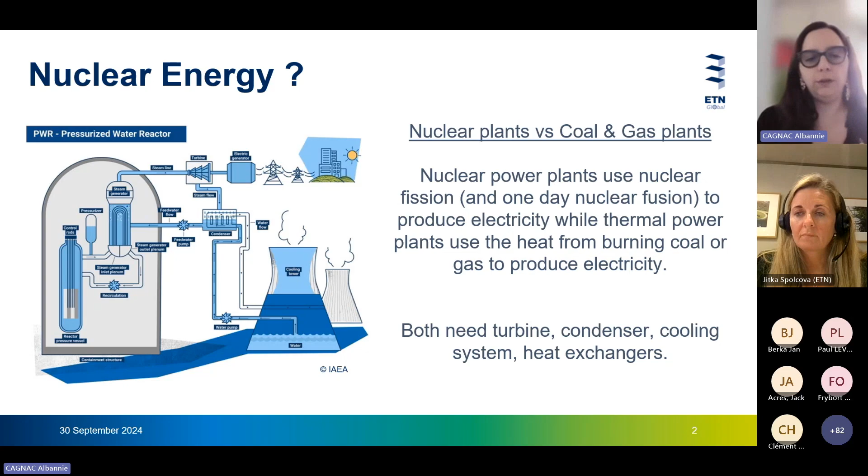Currently nuclear energy is 10% of the worldwide production of electricity, so more than solar, wind, and geothermal, and less than hydro. We still have coal and gas as the first plants.

But things are changing. For example, in Europe, so in the European Union, we now have between 22 and 24% of the total electricity produced with nuclear energy.

You can see that a lot of countries are already using nuclear energy in the European Union and also in the UK. We will see in the next slide and with all the presentations that there are a lot of projects to maybe have more countries or more designs with nuclear and supercritical CO2.

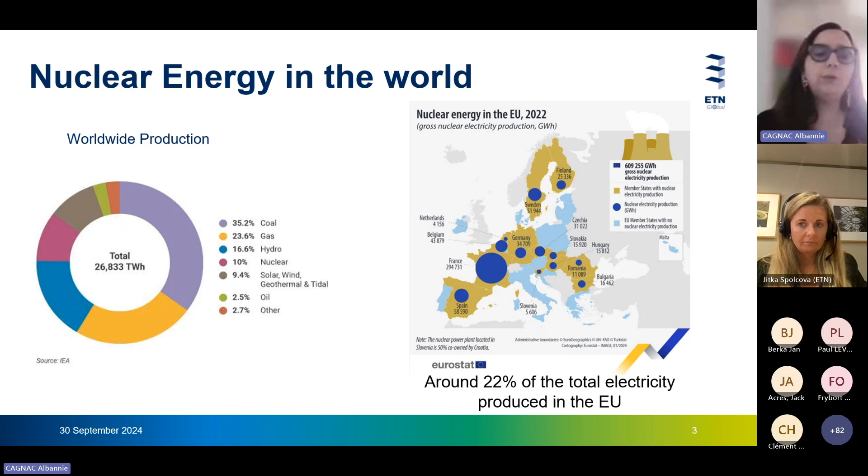But why do we choose nuclear technology today? Because I think that in the mind of a lot of people, and for example me some years ago, we think, okay, nuclear plants are the same since the 60s. But now we have a technology that has evolved with scientific and engineering advances.

So yes, we had the first generation in the 60s until the 80s, and now we are currently using generation 3 with some concepts you already heard about, like VVER, EPR in Europe, but also APR, or for example the AP1000 with Westinghouse.

You have to know that since the first ideas of nuclear energy used for electricity, we also thought about generation 4 - all this innovative design with gas-cooled fast reactors, molten salt reactors - you will hear about it today.

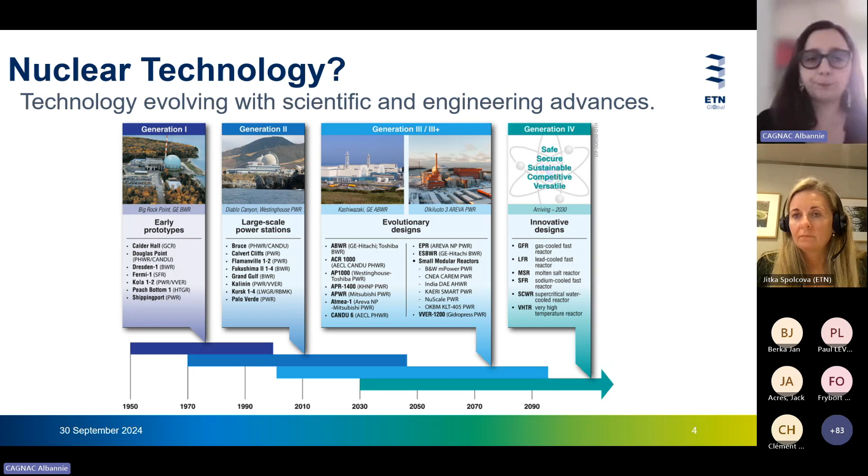So currently we are using generation 2 and generation 3 of nuclear power, mainly with water and steam, what we call the pressurized water reactor. We are studying and preparing for generation 4, and we will present today a lot of designs which are currently from generation 4, and also one design from fusion.

Why use supercritical CO2 in nuclear? You have to think that the first research on the use of supercritical CO2 cycles in nuclear is from the 60s and 70s. It's not a new idea. For us nuclear people, we've thought about the use of supercritical CO2 for a long time.

Because we already discussed in the former episode that we think the properties of supercritical carbon dioxide could be very interesting for us - high density, good temperature for us also.

As we already spoke about the properties of supercritical CO2, we have a lot of generation 4 concepts like the sodium cooled fast reactor or maybe a molten salt reactor, which are at good temperatures and pressures for the use of supercritical CO2 for the secondary loop, so after the reactor in the nuclear reaction. Okay, so that's why for a long time we've thought about this idea.

And if you are looking for studies, there are a lot of publications from the 60s until now dealing with supercritical CO2 and nuclear use. But why today do we choose to speak about this? Because it's not really a new subject.

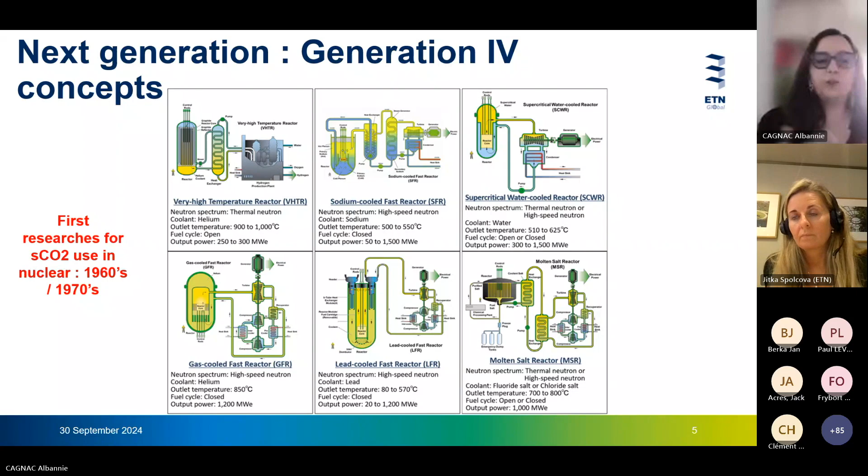It's just that since some years, we have a reviving interest in the nuclear potential for the global transition. Why? Because nuclear is a low emission energy, so carbon free, compared to coal, gas and oil.

But also with the idea of this global transition, we will have a higher demand of electricity and energy in the world. And to be able to reply to this higher demand, we have to think about a lot of carbon-free production. So renewables like wind, solar, or hydro are a good solution, but

we cannot meet all the demand with only this energy, just because okay, we will have solar, we will have hydro, we will have wind, we will have storage, but sometimes we will need to have a very reliable and safe flexible energy.

And we think that we can see in the new scenarios, from IEA or European scenario, also outside Europe, we will have a combination of this energy. So renewable, carbon-free energy, and nuclear. It's not a competition between all this energy, it's just combination. We need all this energy to face the challenge of global transition.

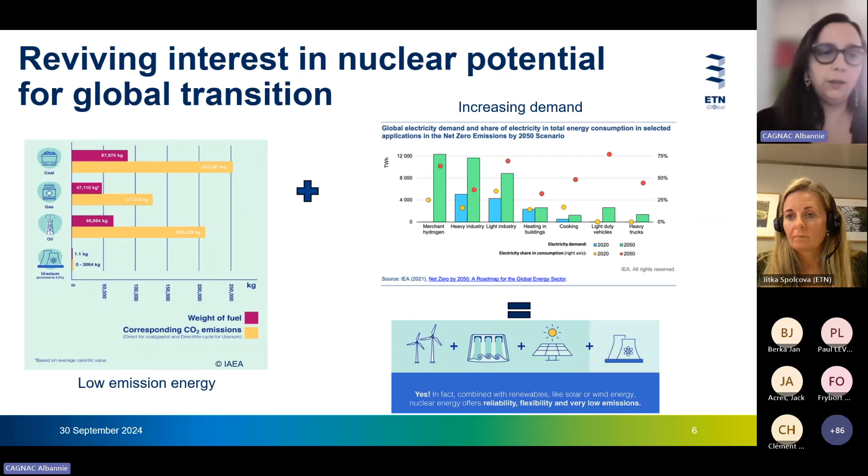Also, what we see in the last year is that maybe the thing is to use nuclear for non-electrical applications. So with a nuclear reactor, as I say, we produce heat. So if we have the current transformation plant, we will produce electricity. But we can maybe put some other transformation plants and have a use of this heat for industry use. But also we have some designs for district heating with nuclear energy, and also desalination.

So if we want to use nuclear for the higher energy demand for this new application, what we can say in the different international scenarios and projections for energy is that we will have an increased power capacity of nuclear in the next years. So as you can see, it's not only nuclear people who say that, it's the IAEA, it's also some projections from IEA reports.

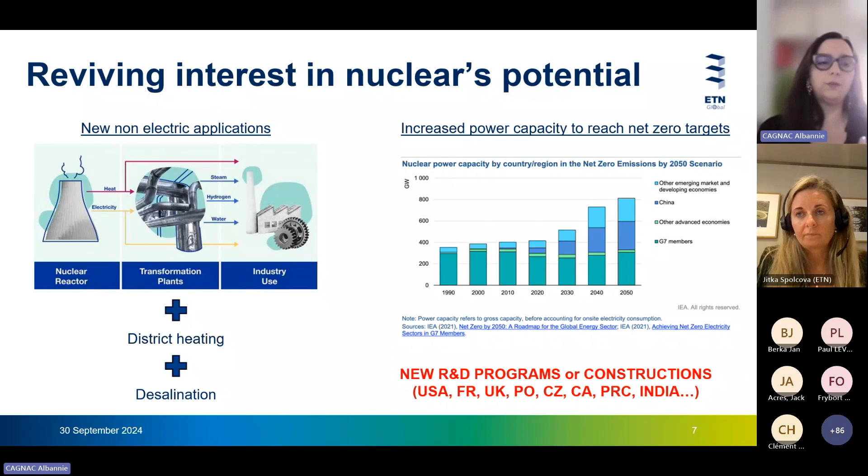And that's why since some years we see new R&D programs or construction in US, in France, in UK, all around Europe. We think we have all this question about the new design. And that's why today we will speak of some new designs also, mainly about what are these new challenges for the competitiveness of nuclear.

What is small, and what we expect for these SMRs, is that the plant will need to be a fraction of the size of the conventional nuclear plant. So for that we will need compactness, and that's why we saw in the former episode that a cycle with supercritical CO2 could be very compact.

We think also we need to have modularity, so to be able, for example, to have a factory assembled plant and transport it as a unit to the location for installation. And we saw in the former episode that this modular question to have integrated units is also a question for the supercritical CO2. And also, so the reactor, not only to produce electricity, but to generate heat and maybe higher temperature heat than the current power plants.

Heat at higher temperatures than the current power plants that are around 300, 400 degrees, so to produce higher temperature heat. And the new concept of SMR can produce this energy.

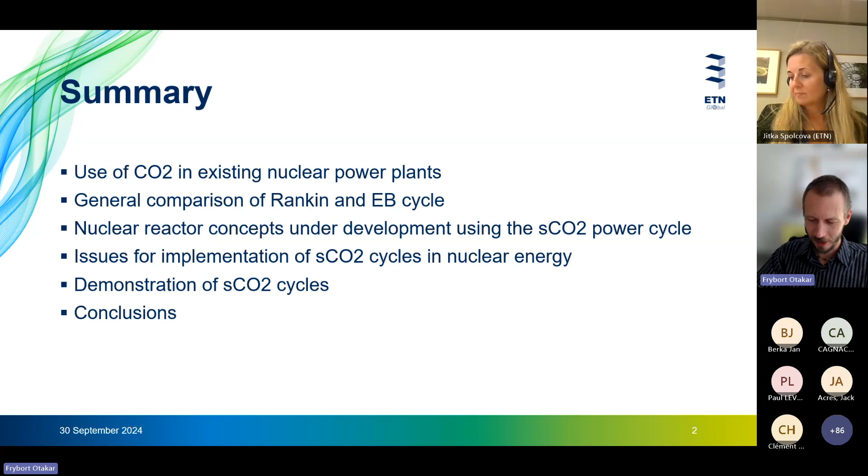Let's start. I will briefly introduce the use of CO2 in current or previous nuclear reactors. Then I will show you very shortly a general comparison between the Rankine and Ericsson-Brayton cycle, and then I will introduce some selected reactors currently under development worldwide which use CO2 as a power cycle. Then I will shortly touch on some issues for implementation of CO2, though I'm afraid I will just repeat what Albannie already said. Then I will shortly talk about what we can do with some demonstration of the CO2 cycle, and I will go to my conclusions.

Most of you who are familiar with nuclear energy should know the AGR nuclear reactor, developed in the UK and first commissioned in 1962. It's a reactor driven by thermal neutrons, with a graphite moderator, and the CO2 in this case is in gas phase, so it's not supercritical but subcritical. It serves just for cooling the active core of the reactor, and the power is generated through a Rankine steam cycle.

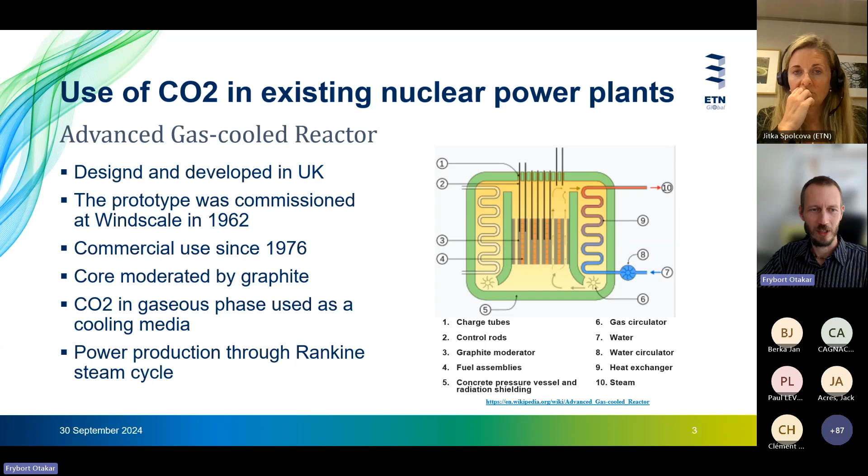This was not the first reactor of its kind, it's some kind of continuation of the Magnox reactors, and some of the AGR cells still operated in the UK.

Then I selected another example, which is also quite similar. It's again controlled by thermal neutrons, meaning it's also moderated, but in this case the design was from Czechoslovakia, and it was commissioned at Jaslovské Bohunice in 1972. This reactor was moderated by heavy water, and again CO2 was subcritical and used just as a coolant of the reactor core, with power production again done through a Rankine steam cycle.

In this case, it finished with a pilot, as there were two accidents during five years of operation of this reactor. Just 100 grams of silica gel forgotten in the fresh fuel assembly caused partial melting of the core and the accident, which totally stopped the operation of the reactor.

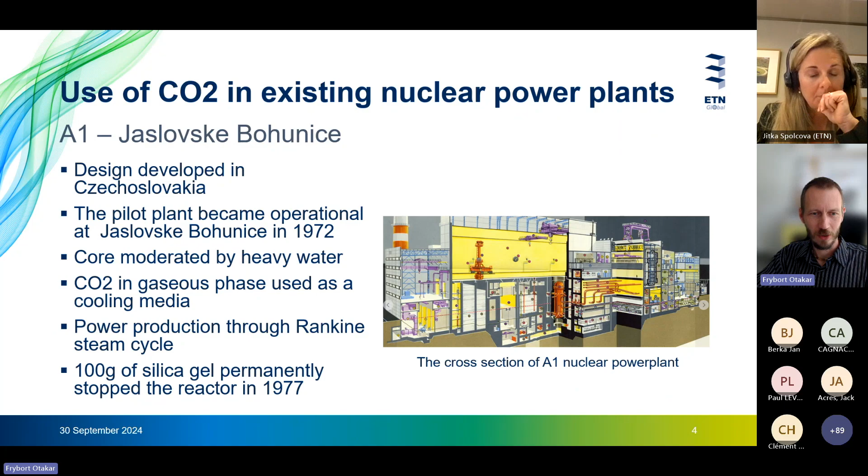Now, very shortly, why should we use CO2 in new reactors? As you know, the Rankine cycle can be quite simple or quite complicated, depending on the structure or architecture of the cycle layout. The same, or maybe more complicated, applies with sCO2. It's possible to design a simple Brayton cycle with regeneration, or more complicated cycles with intercooling or reheating. There are recompression cycles, precompression cycles, partial cooling cycles, and the final selection depends on many boundary conditions and the final goal of the application.

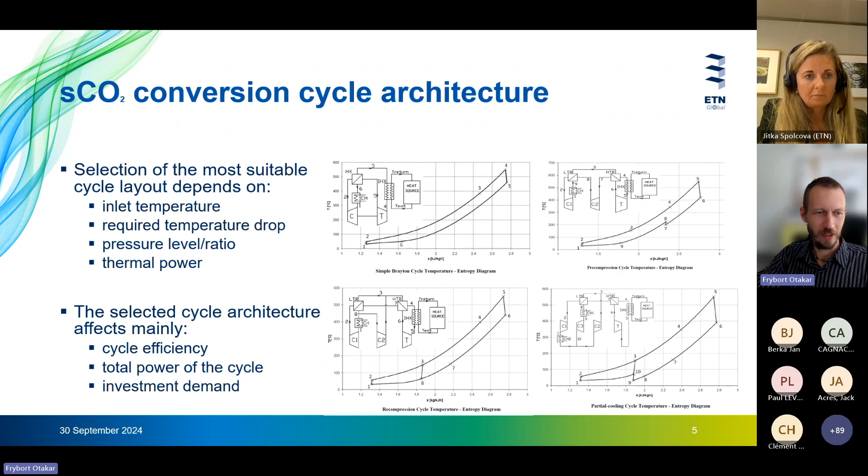What can decide the cycle architecture are the maximal temperatures of the cycle, or the quality of the heat, and also the temperature drop, which is interesting. It's a different case when you use it for a coal power plant versus a Gen 4 reactor. Probably the main goal is highest efficiency, but there can be cases where the cycle should just be reliable, and efficiency is not so important. So it's quite tricky to select the best cycle configuration.

Now for a general comparison with the Ericsson-Brayton cycle, I'll use this picture, which is quite familiar. It's 20 years old, from Václav Dostal's thesis, but the thermodynamics haven't changed much since then.

So even this graph is quite current. You can see the blue line, which shows the efficiency of current superheated steam cycles. With this technology, we can reach efficiency up to 42% generally, or something like that.

Then we can, of course, use supercritical steam cycles, which are also operated and generally have higher efficiencies, but there are some limits. The efficiency can reach something less than 50%. I've seen some studies about 48% for the cycle.

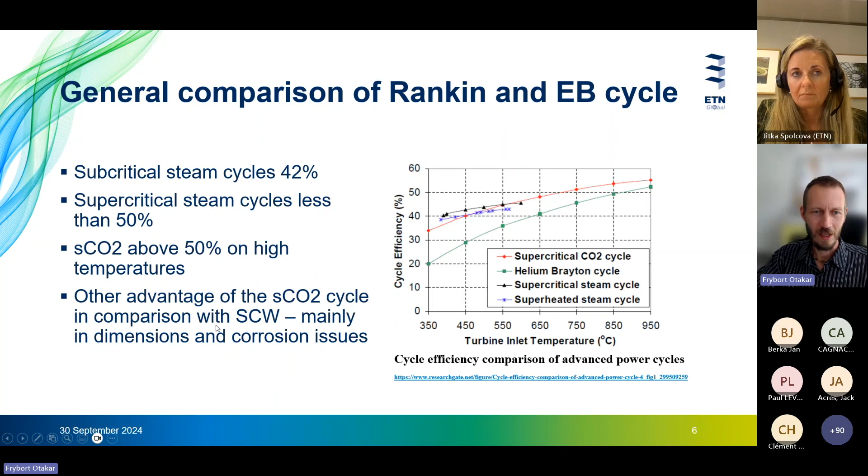Now the advantage of CO2: generally the efficiency is higher compared with the previously mentioned cycles, from approximately 550 degrees Celsius. But there are other benefits too. I didn't focus my presentation on the benefits of a CO2 cycle, as it was discussed many times, but like Albannie said, modularity and small dimensions can be an advantage compared with supercritical cycles and so on.

I selected 3 quite interesting projects which combine the sCO2 cycle with nuclear reactors. The first case is a design by TerraPower, where CO2 is used as a primary coolant and also for production of electricity - meaning it's a direct cycle.

The thermal power of this reactor is 500 megawatts, and what's interesting, the temperatures are 550 degrees Celsius with 22.5 megapascals, which can be quite challenging together. But in this case, the expansion is split, so in the nuclear reactor there isn't full pressure and full temperature, but some lower value - I don't recall the exact number. It's quite an interesting design, and gross efficiency is calculated at 41%, with overall efficiency at 36%.

So you can see that this is a benefit compared with current PWRs.

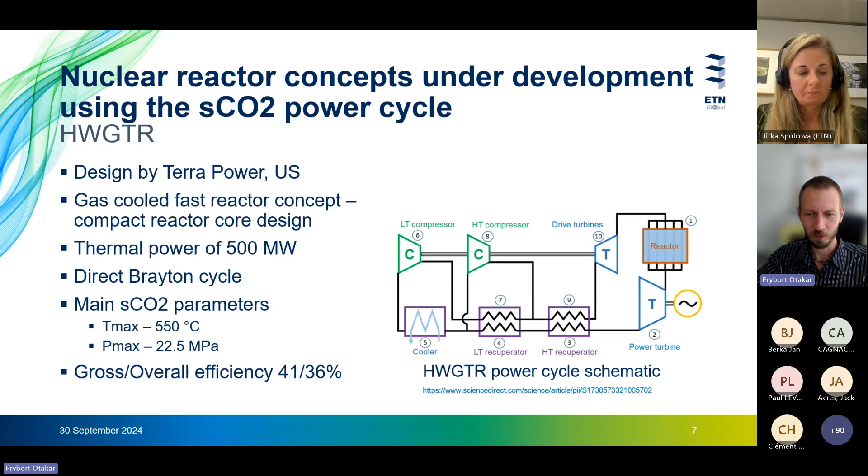The next 2 examples are more, let's say, future reactors. This design was created by CVR, my company, and in this case - sorry, I forgot to mention in the previous case, this is designed as a fast reactor, so it's a very compact core. In this second case, it's thermal neutron-driven.

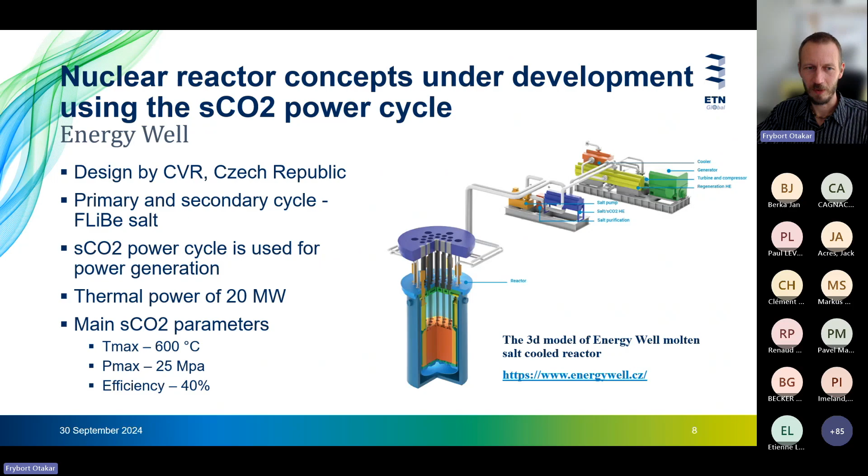The primary and secondary cycles are cooled by FLiBe salt, and the tertiary cycle, the power cycle, works with sCO2. Maximum temperature is set to 600 degrees with 25 megapascals of pressure, and the efficiency is calculated at 40%. It's not that high, but it's also affected by the size of the cycle - it's quite small, and the turbine power is about 7 megawatts.

The last of the selected cases is from Korea, from KAIST. They call it a micro-modular reactor, where CO2 is again in a direct cycle, so it directly cools the core and drives a turbine with the most challenging parameters of these 3 projects - temperature set to 650 degrees with 20 megapascals of pressure. Again it's quite small, as we can see from its name, micro-modular reactor, and the efficiency due to this is 33%.

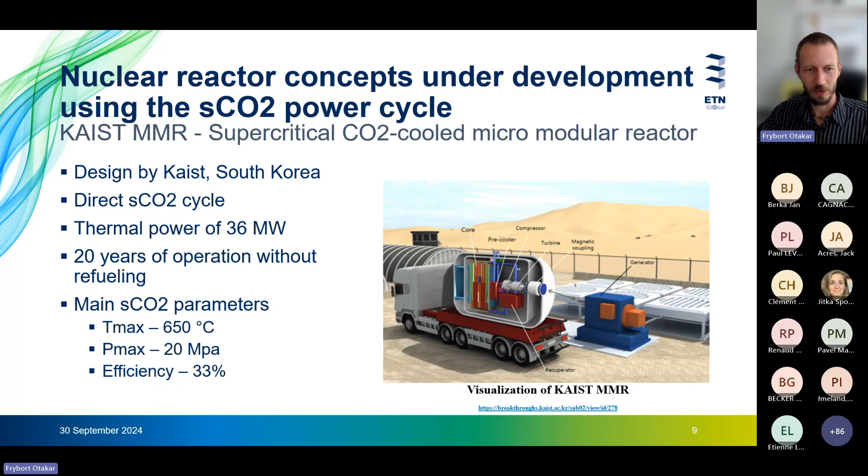Now, about some issues which I can see in implementation. We can make a list of issues, but I selected, from my point of view, the most important ones.

One issue is that for generation 4 nuclear reactors, the main technologies involve reactors cooled by liquid lead, molten salt, gas, and other concepts, and mainly - instead of the supercritical water reactor - the reactor pressure, or the pressure of the media in the core, is up to 70 bar, and with some concepts it's even ambient pressure. So it's quite tricky to combine this low pressure primary cycle with a secondary cycle at 25 megapascals, which is quite high.

But probably the key issue is the licensing of the reactors. It's quite challenging to license even generation 3+ reactors, some PWR or BWR. And now we are coming with completely new technology which hasn't been fully verified, and we don't have any data about the reliability of the components and so on. So the technology needs to be demonstrated first before it can be used for application with a nuclear reactor.

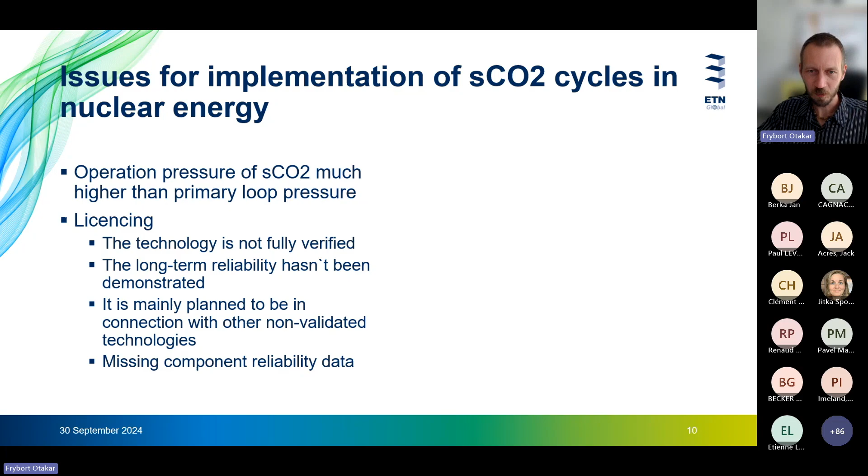From my point of view, the best applications where we can demonstrate the CO2 cycle and find out its reliability are, for example, waste heat recovery systems or thermal energy storage systems, or some projects for CSP application combined with the CO2 cycle.

And what we do for that - we build different experimental loops worldwide. The most famous is probably in the US at Sandia, but there are also smaller loops at CVR or in Europe, for example in Vienna at the Technical University of Vienna.

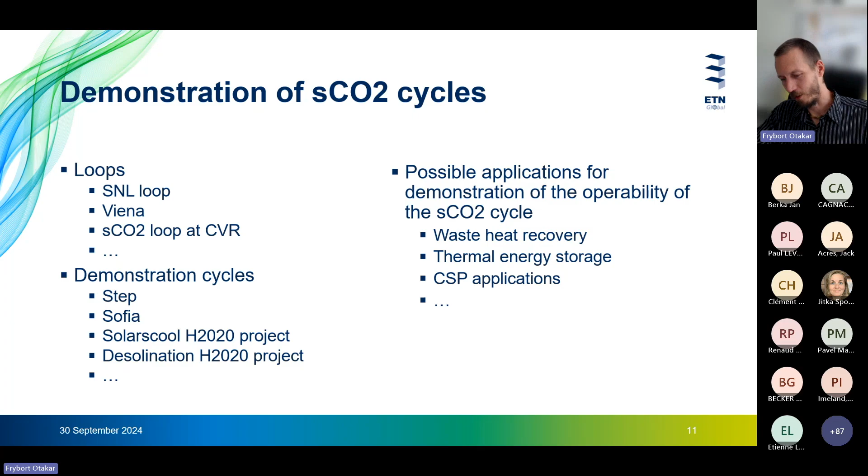And currently in the US, there was commissioned, or it's being commissioned, the STEP project, which is 10 megawatt cycle, and the next 3 cycles listed here, Sofia, and in the frame of the Solarscool project or desalination project, that are 3 prototypes which should be built with a megawatt scale turbine in Europe. So that's the way how we are going to verify and obtain all necessary missing data.

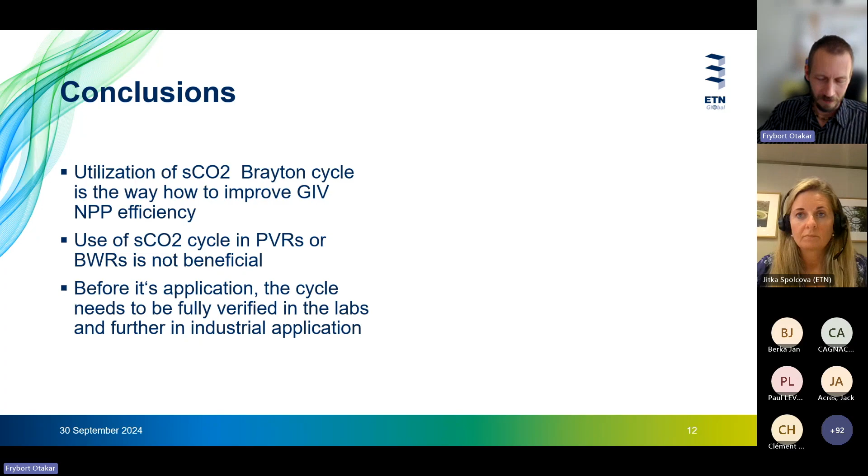And my last slide, conclusion. So definitely using CO2 cycle is the way how to improve the efficiency of nuclear reactors. I didn't mention it in my presentation, but it's probably useless to combine PWR or BWR with sCO2, as the efficiency is limited by the primary coolant temperature. So there will be more risks than benefits in combination of this, let's say, generation 3 reactors with sCO2. And as I said before, for first application, we need to verify the cycle. That's all from my side.

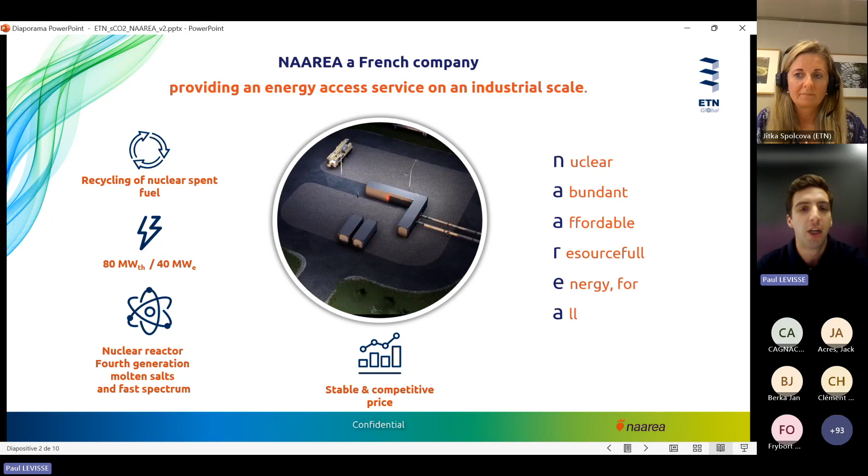So I'll go quickly over this because I think we want to apply it more to sCO2, but it helps to understand that we're trying to sell electricity using small modular reactors, and our key target and key market goal is mostly industrial plants. That's our primary target, because in this 80 megawatts thermal, 40 megawatts electrical range, you're really in the range of what a big industrial plant will ask for in terms of electricity needs.

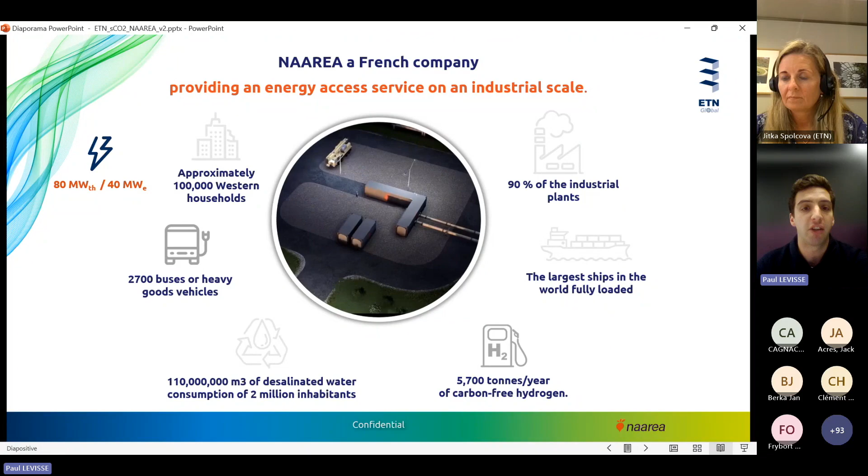And so with small modular reactors, you can place yourself extremely close to your client, and so you can supply them with either heat or electricity depending on their needs. And so that's more or less what we're aiming to do at NAAREA. So use a molten salt reactor, which has passive safety because the salt expands and stops its nuclear reaction. We use spent nuclear fuel, and we build all this inside a 40-feet container in a factory that we can then ship or transport to the client. And so that has a lot of advantages.

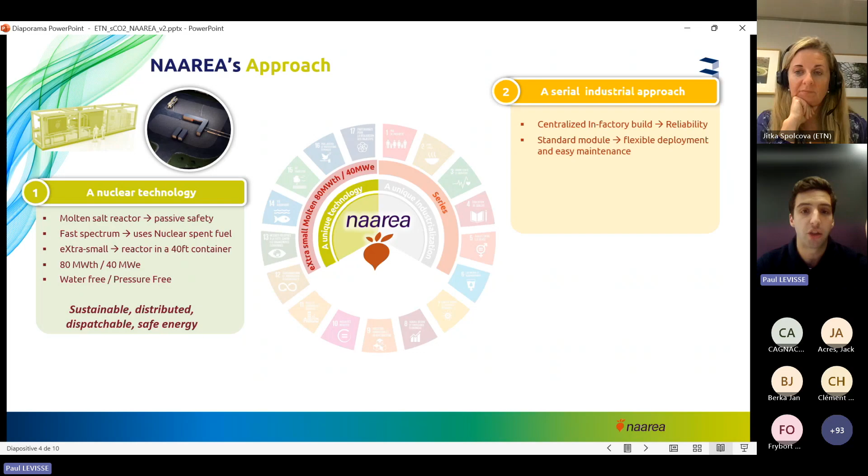So we're building small modular reactors with molten salts. We want to develop them in series, so we've got the objective of making a serial industrial approach. And that's really the advantage of SMRs, which is you can build them in factory, use standard industrial methods to reduce costs and increase reliability, and then deploy them on site. And since it's very small and we can put it into a container, we can have limited civil works, so that simplifies installation and commissioning.

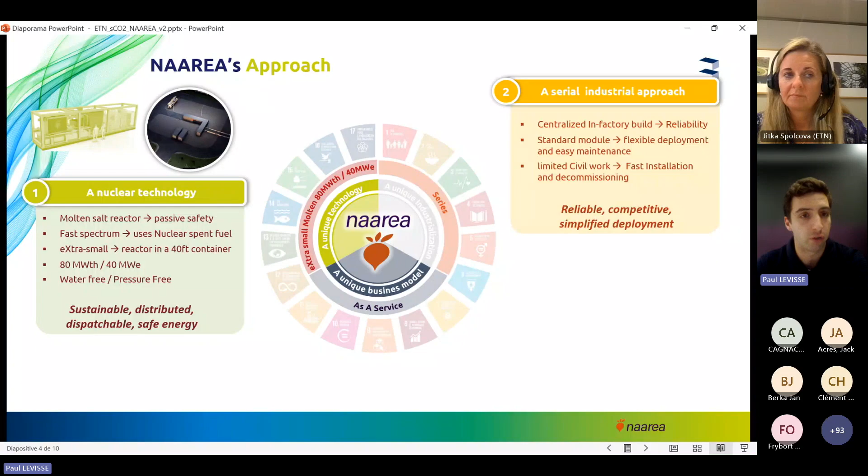And the last point is, since we're a utility, we sell electricity as a service. We're not selling nuclear reactors. We keep the responsibility, and we sell electricity or heat as a business model. So that's a very, very fast draft through what NAAREA does. Small modular reactors, molten salts.

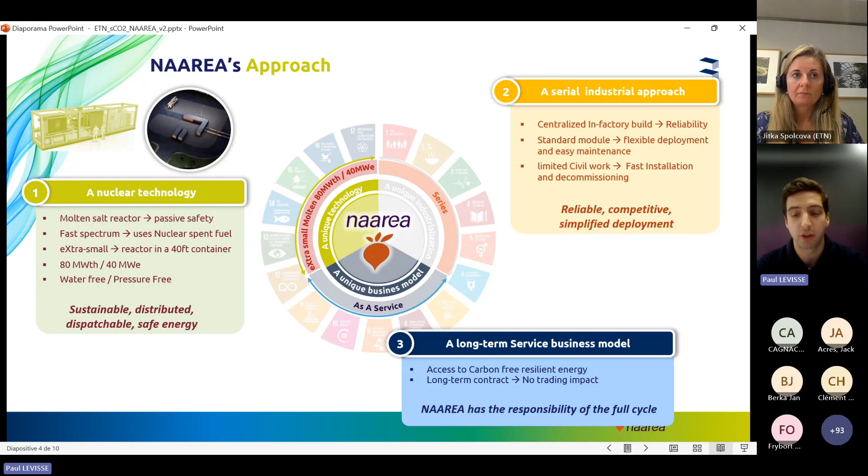The question now is, why do we want to do sCO2 with that? We sell electricity and heat. That's my next slide.

So when we look into it a bit more in depth, what we have is a reactor island, which is 80 megawatts thermal, and which outputs molten salt at 650 degrees Celsius. So that's molten chloride salts.

Then we have to transfer that somehow into electricity or heat. Our target is to use sCO2 for that, for several reasons. Everything that comes out of this reactor island is standard molten salt. It's conventional, not radioactive, and non-contaminated, because every aspect of handling radioactivity is undertaken within the reactor island. So everything radioactive is inside the reactor island. All we get out is heat in the form of molten salt.

Our target is to use a recompression Brayton sCO2 cycle, which is fairly standard, and Otakar has spoken about it at length, and couple that directly to the grid to supply potentially electricity or heat depending on what the client wants. We want to also be able to do load variations to follow client requirements. That's also what we're aiming to do with the sCO2 cycles. It's a standard industrial application here, because all the nuclear safety requirements are handled by the reactor island.

Last element, which is important since we want to be as close as possible to the industrial plants and sites, is we're trying to go for air cooling as the ultimate cold source for the cycle. So have a water loop and then cold ambient air to cool the cycle, because then we can have more resiliency compared to the industrial site locations.

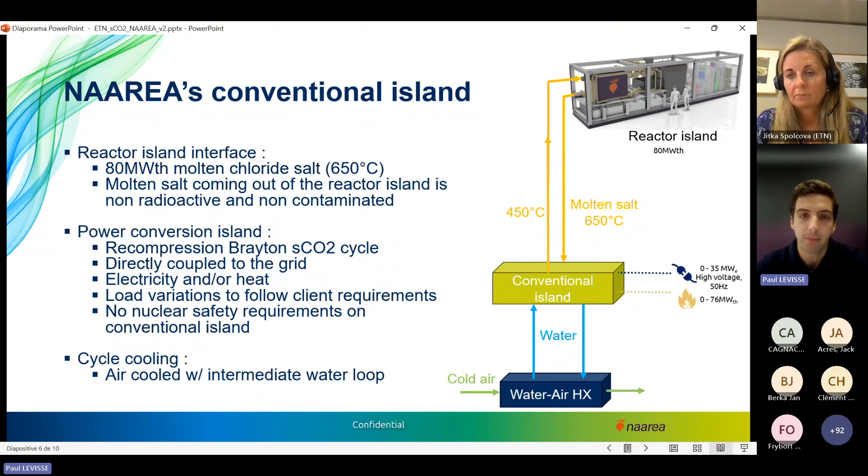So why would we want to do sCO2 with molten salt SMRs? Because we could do just standard steam-powered cycles. But there are, at least I've identified, four of the most significant characteristics of molten salt small modular reactors which make it a good match with the sCO2 cycle.

The first being temperature. Molten salt is a high temperature fluid because it melts at roughly 400 degrees, so you have to use it above 400 degrees, and it can go up to 700, even potentially higher, but then you get limited by materials. We've got that operating range between 400 and 700, and as Otakar mentioned, sCO2 really starts to have a significant benefit compared to steam above 700, or at least above 550 degrees Celsius.

We could go for supercritical water, but supercritical steam has such a high cost in terms of thicknesses that it makes more sense on larger plants rather than plants of this size. There's also a good match between the temperatures of the molten salt and the CO2 temperatures across the main heater. That's more for the thermodynamics of the cycle, but 400 to 700 is really a good match for sCO2.

Second aspect, which interests us a lot, is compacity. These molten salts enable very compact reactors, especially when you couple them with plutonium. You can get something where the core of our reactor, which does 80 megawatts, is roughly the size of a dishwasher. So then you've got auxiliaries etc. around it, but it's really, really small. That's what enables you to do a container for the reactor island.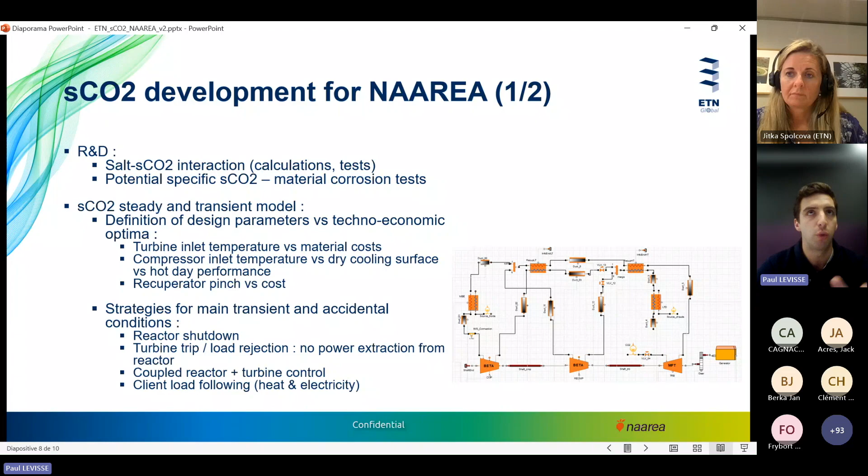And all the questions for that will come in terms of transient and accidental conditions. What happens when you shut down the reactor? What happens when the turbine trips? All these questions of coupling sCO2 with a nuclear reactor in terms of coupled control.

Overall integration: NAAREA is positioned as EPC and operator, meaning we're really integrating these equipments and the sCO2 cycle. We're turning to specific manufacturers and dedicated suppliers for everything that's turbomachinery, heat exchangers, and other equipment. So we're more of an integrator, and as such our main challenges at this stage lie more in the question of demonstration of techno-economic competitivity.

These cycles are really new, so we've got a bit of difficulty projecting the CapEx and OpEx for series production, but that's a critical element if we want to make these cycles viable—being able to project a commercial benefit in the end when we put these into series production. We expect the efficiency benefit and capacity will really be worth it, but we have to get to these series numbers.

And there's also more of a development challenge, which is there are no off-the-shelf solutions for turbomachinery and heat exchangers, which are the two biggest components. So we are launching specific FEED studies and supply chain development, but it's a combination of both component development and cycle development and integration development, which makes it challenging.

As a last small challenge, and as a conclusion, one challenge specific to molten salt reactors is the salt-to-CO2 heat exchanger, which you could also see in concentrated solar plants. But this one is at the crossroads of multiple challenges. We're talking about the heater, which is in contact between the sCO2 cycle and the nuclear island.

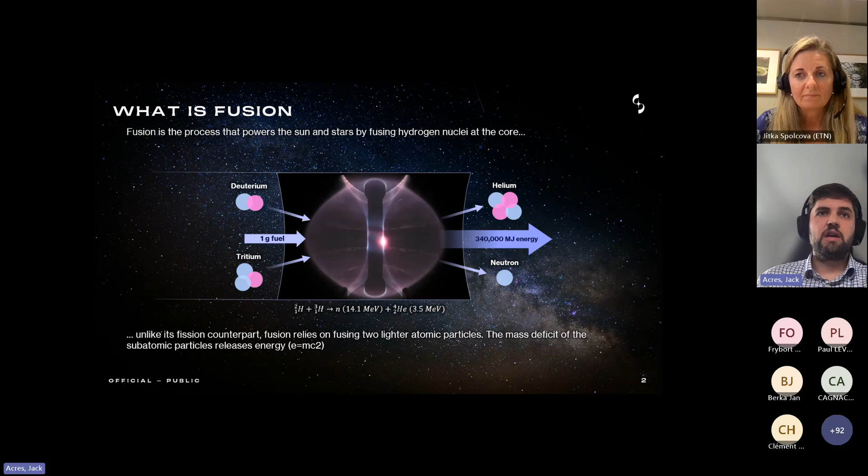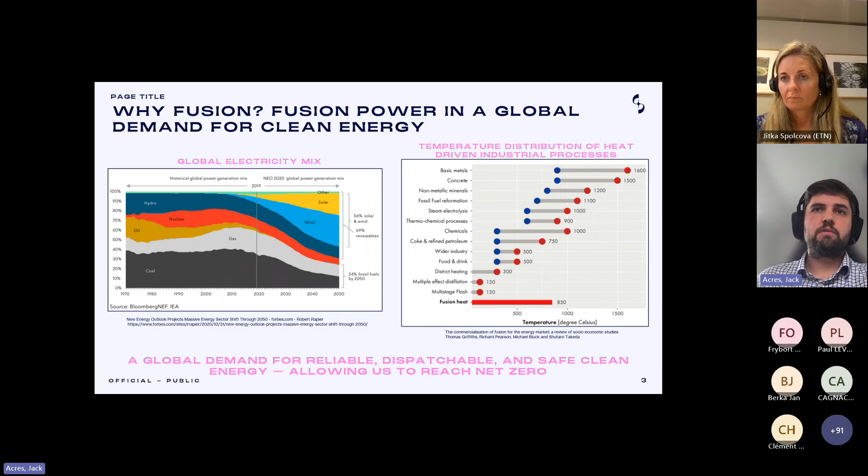Generally speaking, there's a global demand for reliable, dispatchable and safe clean energy, allowing us to reach net zero. Where it's quite different to fission is on that safety element - there's no risk of runaways in a fusion machine. And in the UK in particular, fusion will not be regulated by the typical fission regulators, which is an interesting opportunity.

So that's what it is and why, but how do we do it on Earth? Fusion in the sun occurs at immense pressures and temperatures, and replicating these conditions here is very difficult. It requires very high vacuum to minimize contaminants, and very high temperatures - in fact we need higher temperatures than the sun to overcompensate for the lack of pressure. That's up to 100 to 150 million degrees, whilst the sun is typically 10 million degrees.

And we also need fuel. Typically the fuel that gives us the best bang for buck, the most energy for a given temperature, is deuterium-tritium. Deuterium is widely available naturally, but tritium isn't available naturally - it's man-made and has to be bred locally using lithium and neutrons.

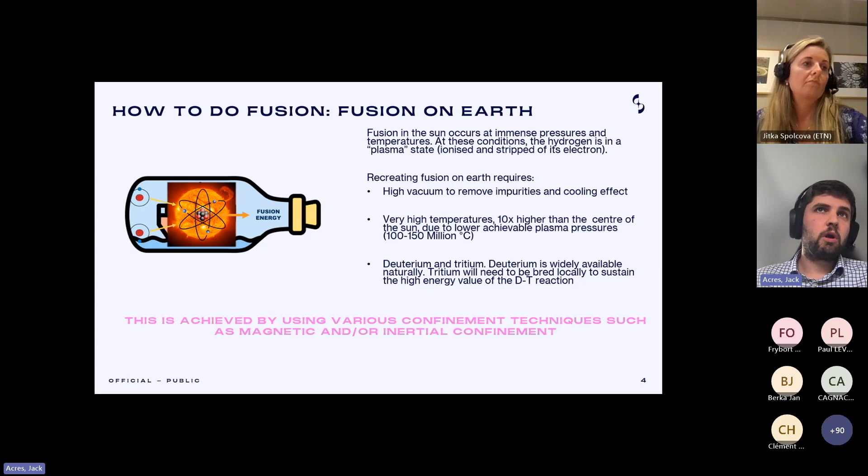So that's how we generate a fusing plasma at 150 million degrees, but how do we actually confine this plasma in place? There are a number of techniques - one is magnetic, another is inertial confinement. I'll talk largely about the magnetic confinement technique, which uses a tokamak - a magnetically confined fusion device where a plasma current is induced using a central solenoid transformer, allowing confinement of the plasma within a toroidal magnetic field. We also have poloidal magnetic coils, which help shape and control the placement of the plasma itself - that's why it's called magnetically confined fusion.

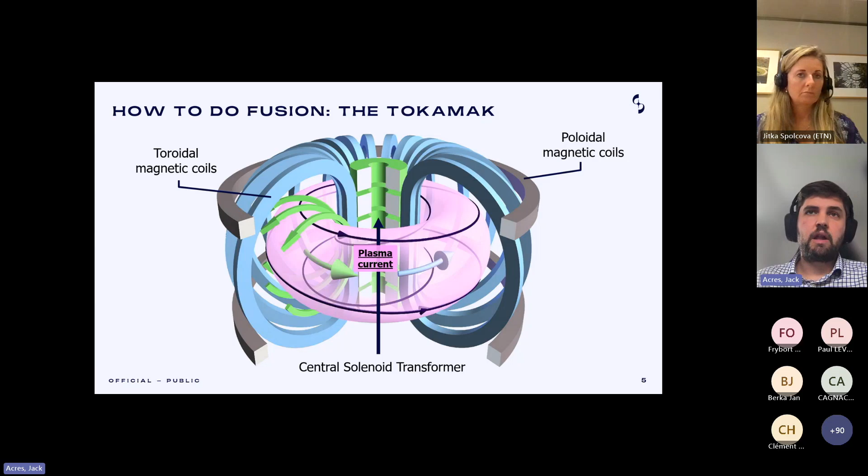So that's a brief overview of fusion, but who is doing it? There are a large number of devices globally at the moment. JET and MAST are machines which exist at the facility where I work. JET has just recently been closed, and MAST is still going.

JT60SA and other supporting tokamaks such as West or DTT also exist. JT60SA is in Japan, DTT is in Italy, and there are a few in France as well. But these tokamaks are actually supporting ITER, which is the largest plasma experiment ever to be built. It's a massive infrastructure undertaking in the south of France, but will remain an experiment rather than a power plant.

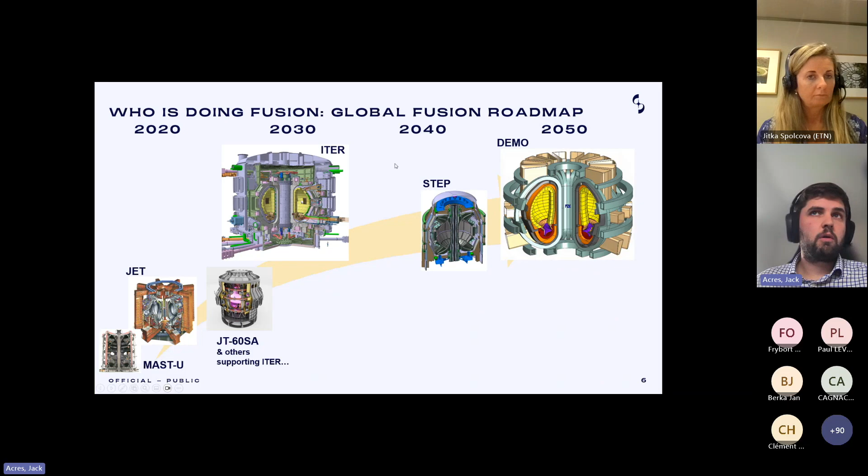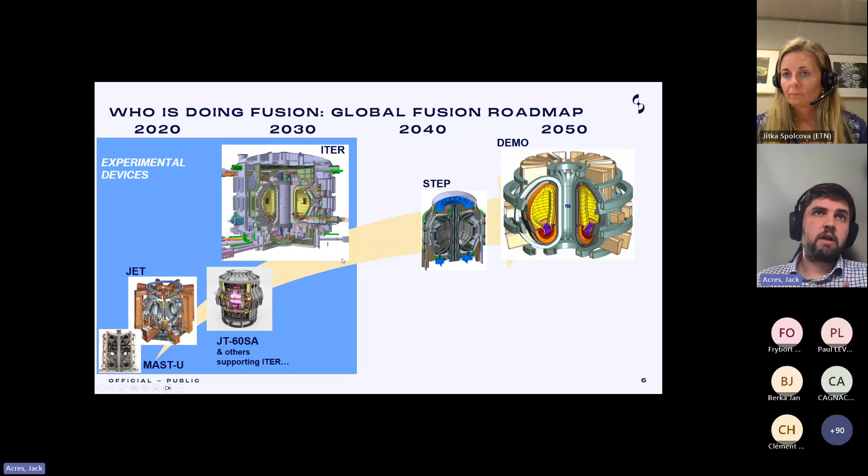These will pave the way to a number of power plant projects. STEP is the one I work on, spherical tokamak for energy production, based on a spherical tokamak, so you'll see it has a slightly different shape to a conventional tokamak like ITER or Demo. Demo is based on ITER. The main thing to bear in mind is that while these ones on the left are experimental devices, these ones will be power plants aiming to put net power onto the grid using these various tokamak devices.

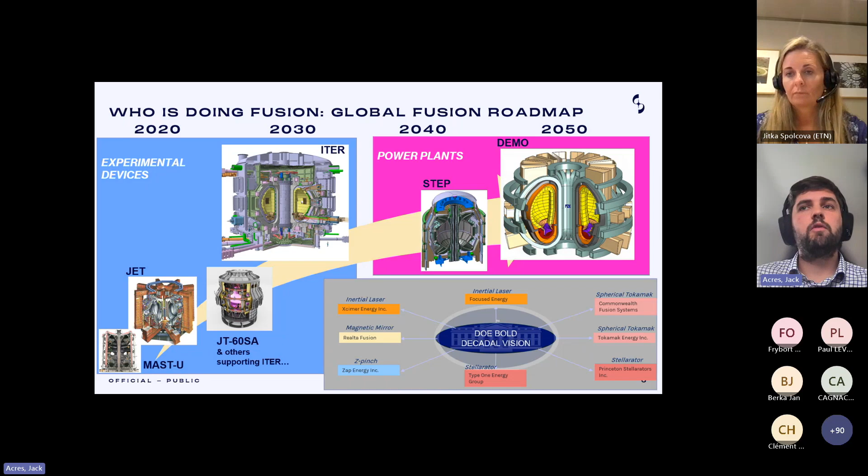Another approach is the US approach. They announced a bold decadal vision, which rather than build their own significant infrastructure projects, is looking to fund a number of promising startups - the likes of Commonwealth Fusion or Tokamak Energy, which are spherical tokamak based. The other ones are stellarator based, which is a very similar technology to the tokamak, still magnetically confined, but there are also others they are funding which are more based on lasers or inertial confinement.

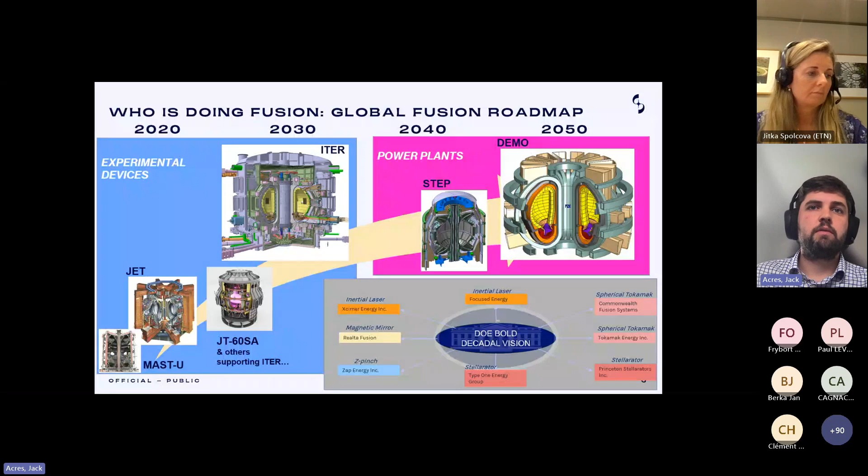So what is STEP? Spherical Tokamak for Energy Production. Like I said, this is the project I work on. This is the mission: to deliver a prototype fusion energy plant targeting 2040 and a path to commercial viability of fusion. A few interesting things to pick out here - obviously the constant joke is that fusion's 30 years away, but we are committing to achieve it in the next two decades. We have also committed to a path to commercial viability of fusion. A prototype won't necessarily be commercially viable, however the subsequent power plants based on the STEP prototype will have to be commercially viable, and we are establishing a whole program to ensure that.

So that's the mission. What is it? Like I said, spherical tokamak for energy production, a fusion power plant which will demonstrate four key things really: this net energy piece, so it will actually put net power onto the grid; fuel self-sufficiency, so you'll remember I talked about tritium - it will demonstrate the ability to breed enough tritium such that it can run itself; it will be maintainable, which is very tricky on fusion power plants and a very critical aspect in ensuring we are able to demonstrate commercial power plants; and obviously there's this piece on commercial viability.

It will be delivered in 3 phases. The first is to develop this concept design and select a site. We have actually selected a site in the UK, in West Burton, and we are just finalizing our concept design now. We will very soon be entering a detailed engineering design phase, aiming to get to a third phase of manufacturing and construction in the 2030s, intending for operations to start around the 2040s.

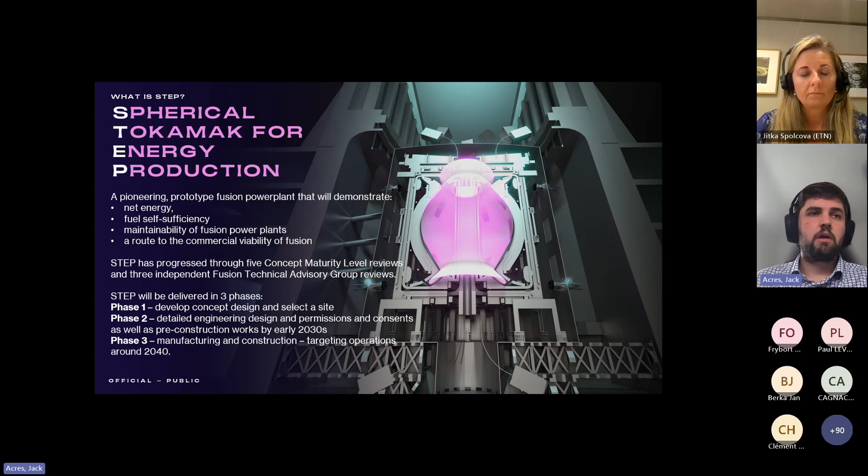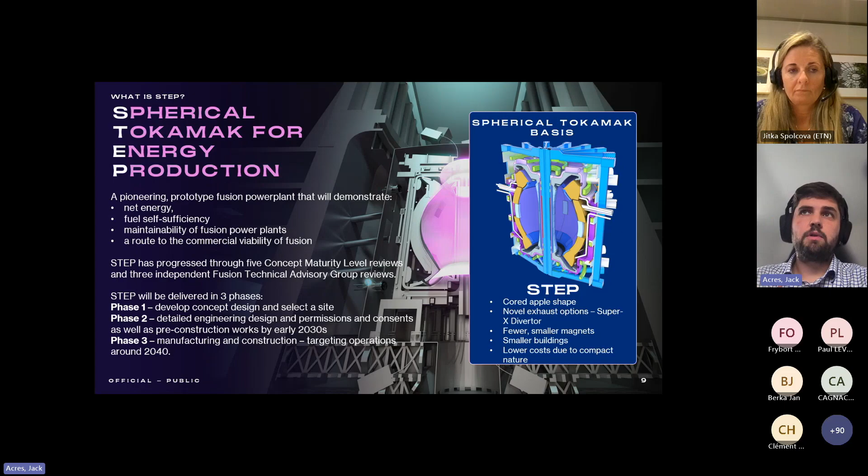It is a spherical tokamak basis. It has a slightly different shape to what I showed earlier in the conventional tokamak picture. It has a much skinnier center column, a much higher, lower aspect ratio, and a number of other facets to it, such as novel exhaust options. By being skinnier and taller, there are fewer - smaller magnets, it will require smaller buildings, and therefore will be lower cost due to its compact nature.

Which sounds familiar. So now to talk about the power plant, or the power cycle aspect of STEP. One thing to bear in mind for any magnetic confinement source is that we start off with fusion power from plasma. This then imparts neutronic heating to the tokamak, which will generate heat, turn it into mechanical work in a turbine, which will then, in a generator, give us power that we can either put on the grid or recirculate. We actually have to do both - when we generate power we'll put some on the grid, but this recirculating power is a fairly unique aspect of fusion in the sense that it's so high.

This is because we need a number of very large-scale fusion-enabling systems, such as our heat and current drive, which heats our plasma to such high temperatures. This is very power-hungry, especially at low scale, but we have other parasitic loads, such as our magnets.

Because of this interesting power balance, we have different ways of defining our efficiencies across the plant and energy gains. Things like Q are referred to quite often - this is a ratio of our fusion power to auxiliary power. P net is the net power generated, which is the power we generate minus the recirculating power. And then a much wider efficiency for the plant is this Q eng, which looks at the net power divided by the fusion power we begin with.

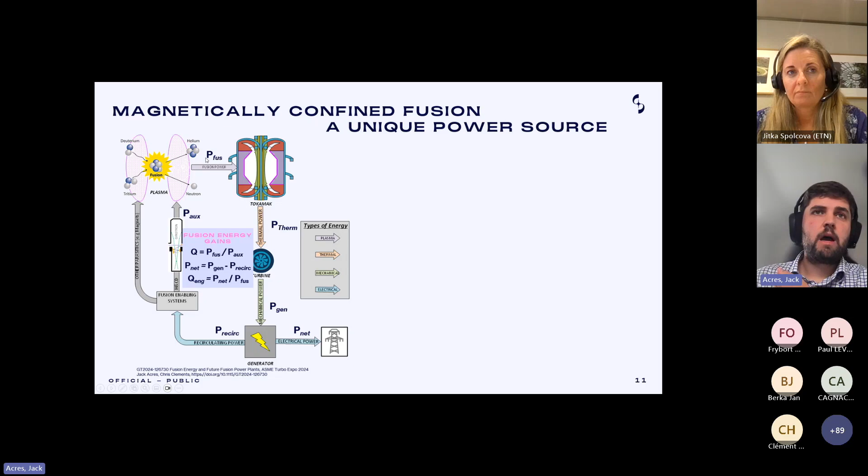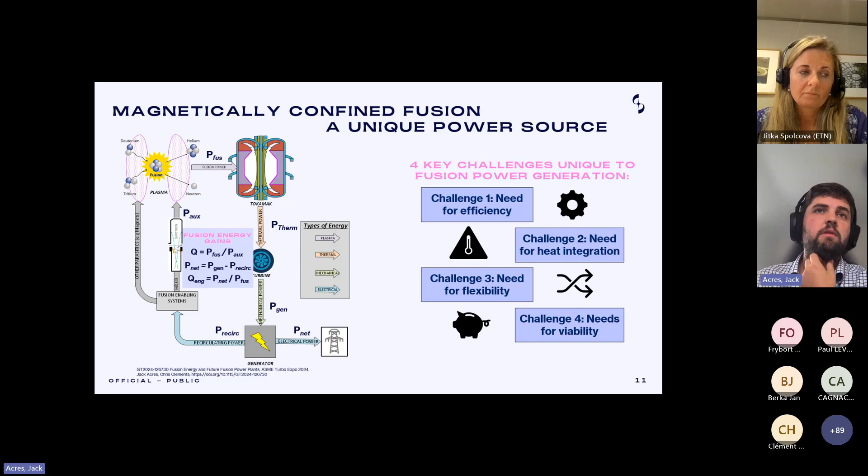Efficiency is key, and I've listed four key challenges. One of them is efficiency. The other one is heat integration. The third one is this need for flexibility. And finally, we still need to demonstrate viability as well in the long term. So I'll go through each of these one by one.

The need for efficiency - like I said in the earlier diagram, there's a lot of high power flows going through, and this is a power balance of our prototype. It looks like significant heat being developed from the tokamak, quite a lot of power generated by our power cycle, but most of this power is then recirculated back into our fusion enabling systems, such as our heat and current drive, and so only a small portion is left to go onto our grid.

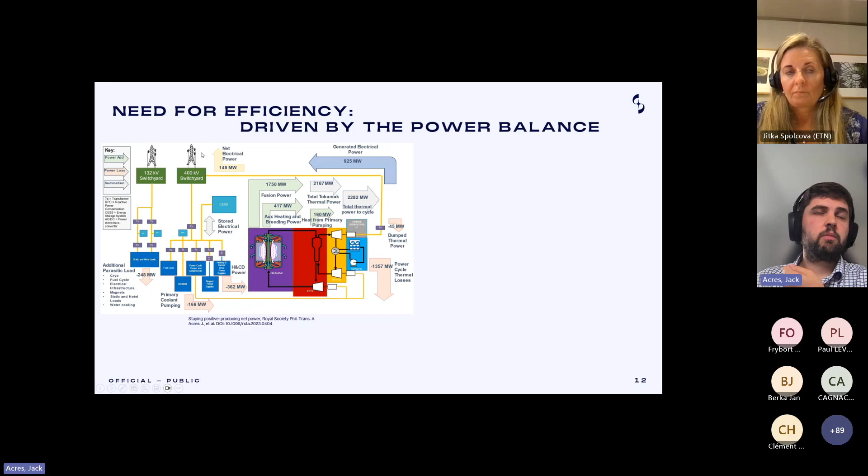As we go to a commercial machine, these parasitic loads do not scale linearly, so they should cap off, and effectively any additional power we can generate here should be all power we can put to the grid. Obviously not quite as simple as that, but broadly speaking.

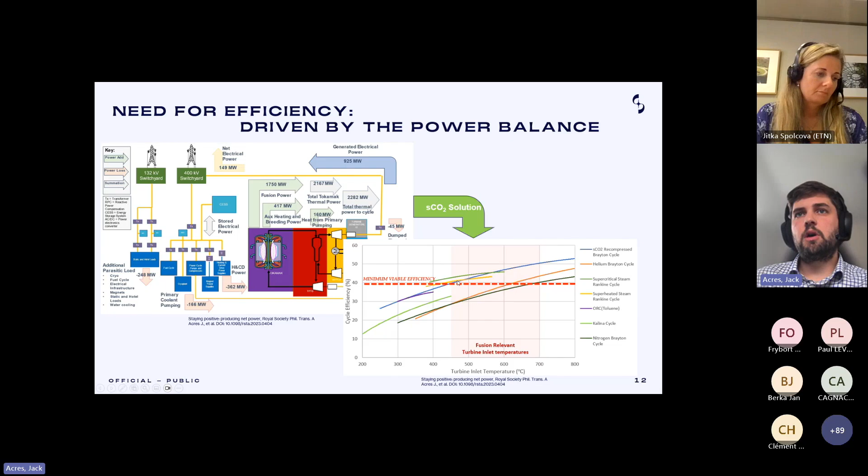So how does CO2 come into play here? Well, obviously we are seeking high efficiencies across the board, which includes our thermodynamic cycle. The more power we can convert into electrical power from our fusion power, the better off we'll be in terms of the amount we can put onto the grid. And that is why the CO2 cycle is quite interesting, because at fusion-relevant turbine inlet temperatures, the CO2 cycle does seem to be very, very promising in terms of performance.

Now let's talk about heat integration. The tokamak is not just one machine - unfortunately, it's made of many different components, which all have very special heating or cooling requirements. For example, our blanket is where all of our tritium breeding happens, and there's a volumetric heat load, which means we can get quite a high temperature out of it, whilst our divertor - what we call the ashtray of the tokamak - will see very intense heat loads as the plasma comes through here, very large surface heat loads, which must be cooled at relatively low temperatures.

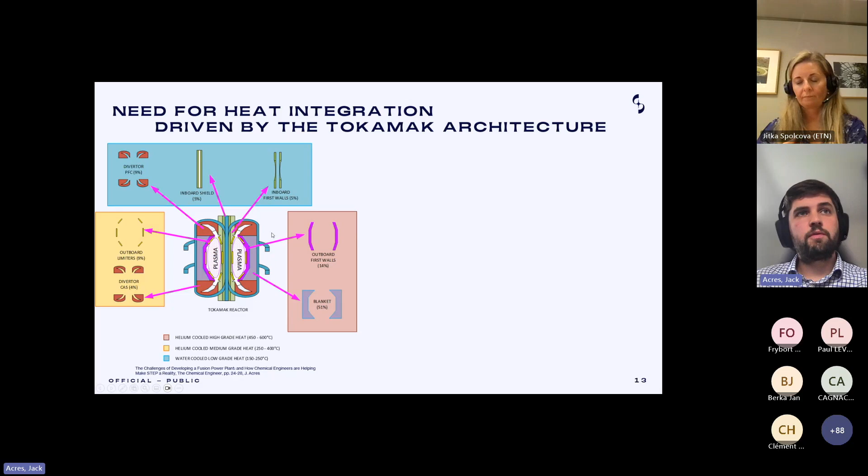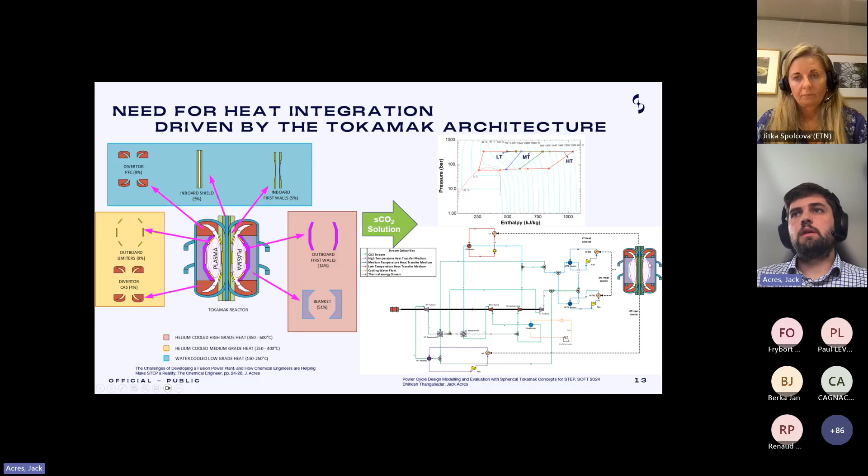So we can't get good grade heat out of this. This presents a bit of an issue in terms of heat integration - trying to integrate all of these different types of heat from these different components into a single cycle is challenging, especially with incumbent technology. So what's quite nice about the recompressed Brayton cycle in particular is that you can start manipulating the enthalpy gap within that cycle to integrate these different grades of heat, for example by adding the low temperature grade heat as a bypass to your recompressor.

The final challenge I was going to talk about was this need for flexibility. Tokamaks are inherently pulsed, and this is a view of the EU DEMO pulse operational time frame - they're looking at doing 10 or 12 minutes and then actually being operational for 2 hours. STEP might not necessarily have these constraints, but it just goes to show that there is this on-off piece where there is a need for flexibility on the power cycle as well.

There's also, more generally speaking, rapid operational dynamics - our startup and shutdown will be fast, shown here as 10 seconds, 100 seconds even. So having a thermodynamic cycle that can help us minimize the gap between when we have established fusion power and are actually generating power to supply all our parasitic loads that are internal is quite important. Finally, there is the fact that we will be a prototype.

So it will be a prototype power plant, which means it will often undergo trips or unexpected events or pulses that are run short because something's gone wrong, or something's gone wrong during the ramp up. So again, a power cycle that is forgiving is helpful.

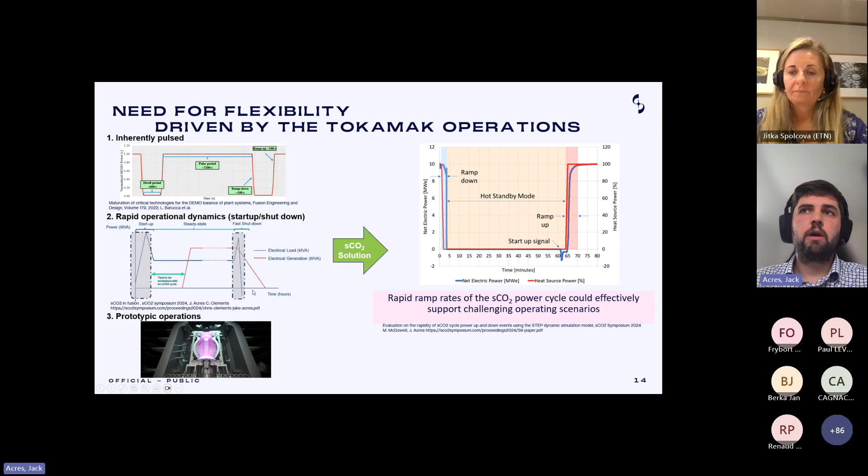So where does CO2 come in? This is the result of a piece of work we did using the STEP demo dynamic model, which obviously needs a lot of demonstration, but goes to show that there is something in trying to use CO2 to help us ramp up and down the turbine and other turbomachinery quite rapidly, which lends itself well to our demands. So just as a very quick conclusion, where can CO2 help us?

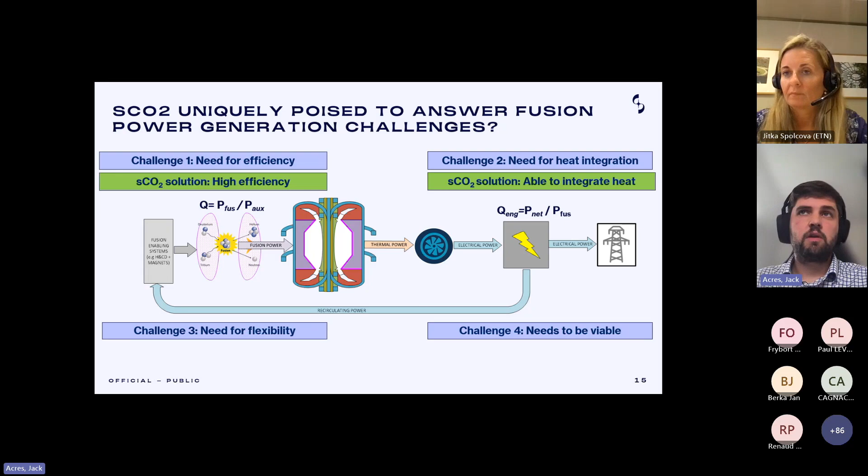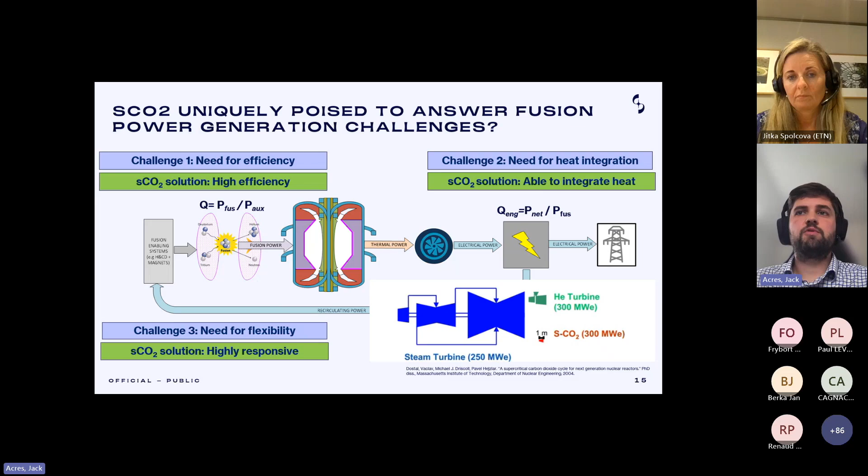What can help us with all these things? So need for efficiency, obviously we've got a high efficiency with our CO2 solution. Need for heat integration, we've shown that the RCBC lends itself well to that. It's highly responsive, which addresses our need for flexibility, and then this needs to be viable. I didn't really talk about it, but it is obviously compact and competitive, as shown by the classic Dostal diagram here, which lends itself well to the general message we are trying to portray in terms of a compact power plant.

And that was it. Thank you very much.